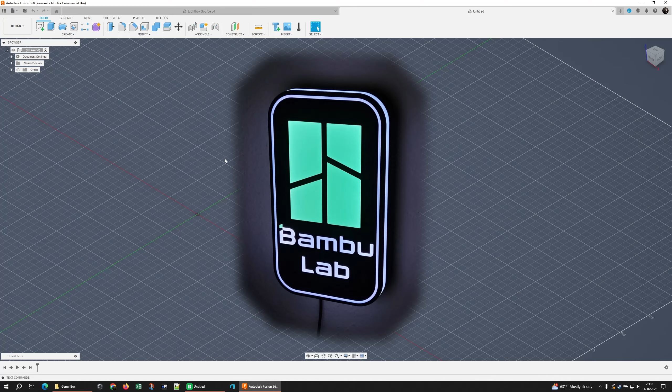All right, so let's make a light box. I've got a new drawing open. We'll start off by creating a sketch, and I'll go to the XY plane.

Normally, if I'm importing stuff, I would create a bounding box, saying 250 by 250, so I know the size of my print bed. But I'm making something I know will fit in there, so I'm not going to do that right now.

I'm going to start out of habit by putting a point down, then hit M to bring up move and point to position. I'll select my point and put it in the middle, 125, 125 - no real reason, I just like it there. I'm going to use this point quite a bit. For example, the very first thing I'm going to draw is a center rectangle.

What size do I want to make this thing? One of the things I love about Fusion, even though I have it set for metric, which I'll use for the majority of this, is I can easily just type in 8.5 inches, which is the size I want this to be. And now I've got 8.5 inches.

If I were to do this correctly, and say I want 8.5 inches here, I'd want this at a certain ratio. I'm going to mimic the size of a monitor and do a 16 by 9 ratio. I don't know what that is for 8.5 inches, but you don't have to just type numbers into Fusion - you can give it math. So I'll tell it 8.5 inches divided by 16 times 9. And now I have a 16 by 9 ratio box to work with.

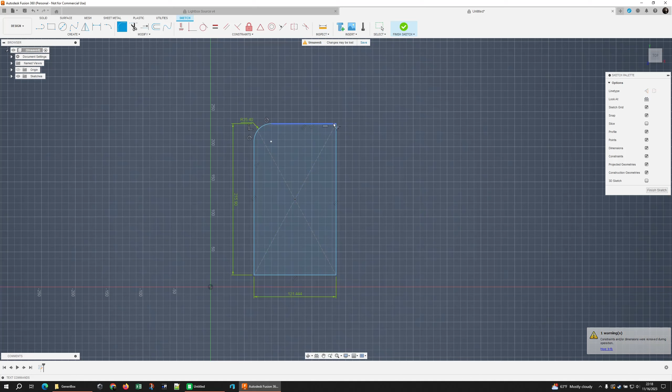You can do this with the solids, or you can do this with your drawings - works either way. I like doing it in the drawing so it has all the elements already there. It makes it easier when you're doing offsets and things like that. It's best to do it in the sketch versus on the solid, at least for the rough shape. When you're refining your solid, that's a great time to do it then.

I know there's a key for repeat, I just don't remember what it is - it'd be nice if I could remember that. But there we go, a nice little round box.

Now, this is 215 millimeters, so I know out of my 250, I have a little bit of room to work with. I'm going to do a few offsets on this.

My first one - and this is where more math comes in handy - I like to set all my line widths to 0.42 millimeters in Bambu Studio. I haven't done that quite yet. I need to change - actually, no, I already have, it's just the sparse infill that's big. So yeah, all my line widths are 0.42, some of these are not the default, some are.

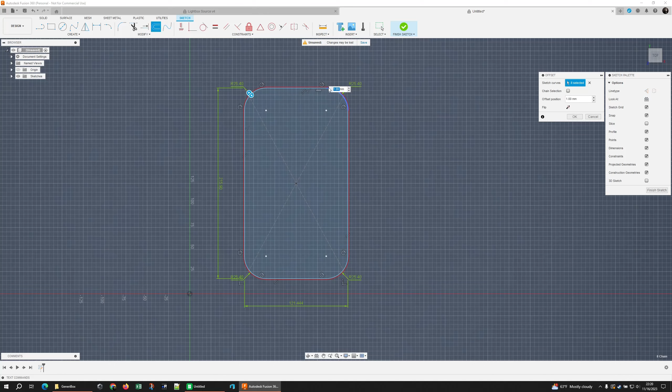So I'm going to work with that as my multiple here. I want these walls to be, I don't know, 5 or 6 thick - let's go with 5. So I'm going to tell it 0.42 times 5 - oh, come on, get back in the box - and now I have a 2.10 millimeter thick wall.

Awesome, I need to do that again. Now that I know it's 2.1, I can tell this to do another offset by hitting O. By the way, I was double clicking - let me go back. Just click a line, you get one piece; if you have a continuous line and double click, you get the whole thing. So O for offset, 2.1 times 2. I could have just typed 4.2, but I'm trying to show that point.

So I have my two offsets, and when we extrude this, you'll see why I have those as they are. Got a little bit more geometry I can work with here, which is good stuff.

I'm going to cheat just a little bit - I have a handy little reference that I usually start my light boxes in. I'm going to come in here and steal, oh come on, just my keyhole. Just select it, Control C to copy, come back over to this guy, hit paste, shows up down here.

Control V for paste. Now, real quick, I'm going to draw a couple of sacrificial lines. I want one going this way, and one going this way.

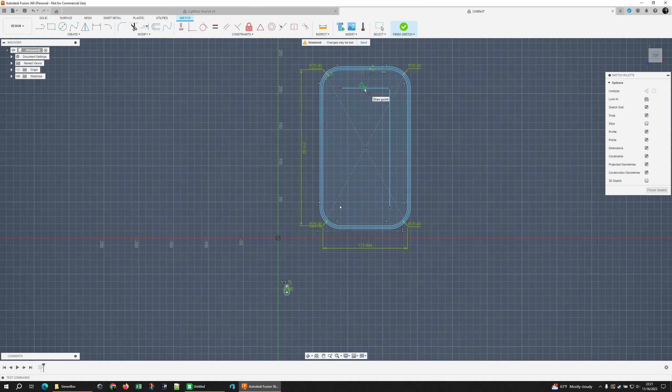I'm then going to create a point on that, one in the middle - that's what that little triangle means - and one in the middle there. We can delete those lines now, we don't need them, they were just to orient my points.

I'm now going to select my keyhole and hit M for move. I'm going to scroll in here so I can actually click on it, and point move that hole, or that point, to right there.

Then I'm going to grab it again, hit M for move, point to point, that same point, this point, except now I'm going to click create a copy, and I'm going to rotate.

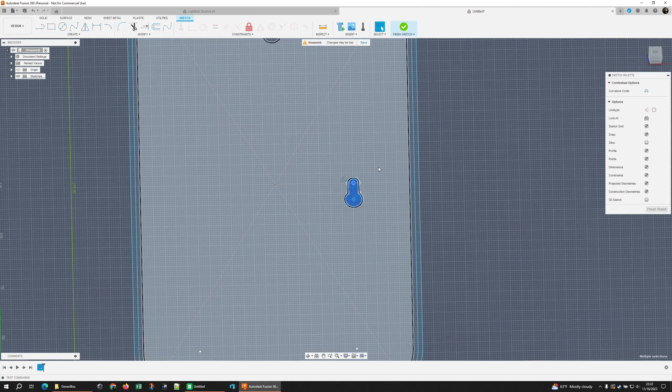I have to go select an axis. Yeah, we're not going to rotate it that way. Now I'm going to select it and hit move again so I can rotate without an axis. Nope, I have to select the right one. And rotate it here.

I'm going to use these to cut holes in the body when it's finished. These are so the box can hang in either a portrait or landscape orientation off of a thumbtack, a nail, a screw, or whatever.

That's all I need in this drawing. Yeah, we're good, so finish that. From here, we could start putting a few things together.

Going to, first of all - well, I want to put another feature in here, and I guess I'll make it part of a different sketch. So this one I'm just going to call box. I label and name everything because it helps.

So we'll do the basic extrusion on this. First things first, I'm going to grab all of it and extrude up. I'm going to print the base of my light box at 0.28 millimeter height.

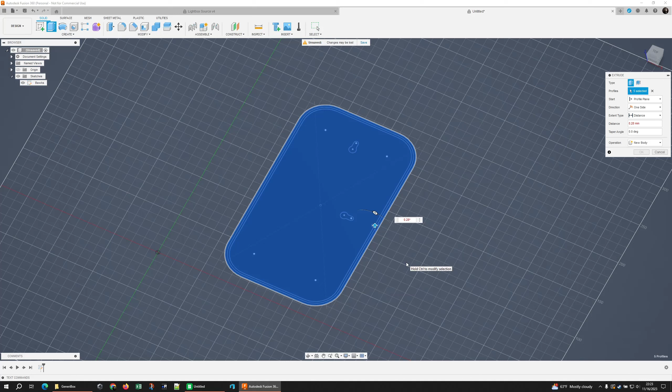So for this, I'm going to tell it I want - come on, move over here - I want 0.28, and I want that to be, I don't know, 8 layers thick, a little bit of infill in the middle. I think 8 will work.

How thick is that? I'm tired, math is hard. Well, if you want to see what that looks like, what the actual distance is, you can click inspect, click on the top, flip it over to look at the bottom, click on the bottom, and it tells you - that's hard to see, but 2.24 millimeters. I'm okay with that, I like that height. That works for me. So we'll close out the inspect tool.

Now, when you extrude for the first time off of a sketch, it turns your sketch off, so you have to turn it back on.

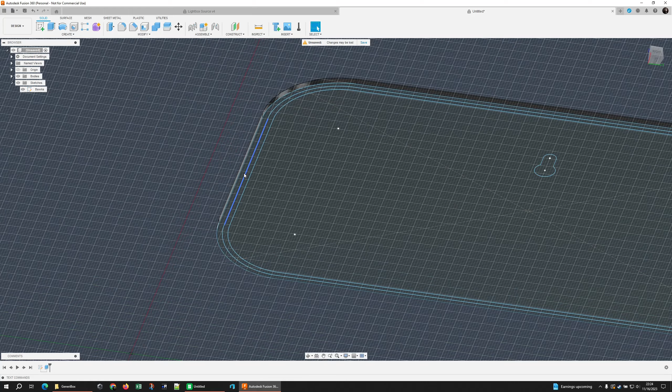For this box, I'm going to do a few things. I have a fairly standard pattern that I work with. I'm going to kind of work in reverse, and this might be a little bit confusing, but I'll explain why.

Okie dokie, I'm going to grab that same part again, that same plane of the sketch, or sketch face I think it's called. I'm going to extrude that again. And I know what height that was at because I'm doing the math in my head.

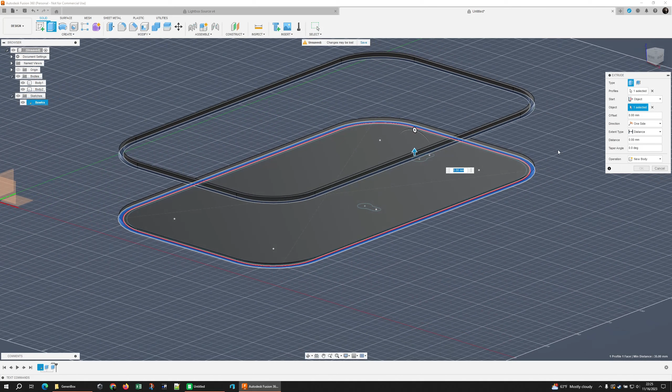But let's say I don't know where it is because it ended up somewhere funny. I can click on Start Object, and click on that part right there. It's going to start from there, and now I can tell it I want it to come down another 10 millimeters. This is going to try and join them together.

The default operation when you have touching bodies is to join. I'm going to tell it to create a new body instead because I want this to be a separate piece - this is going to be a decorative piece.

Okie dokie, and I'm going to do it one more time. In this case, I hit E for extrude, and my extent type is going to be to object. And I'm just going to bring it up to here.

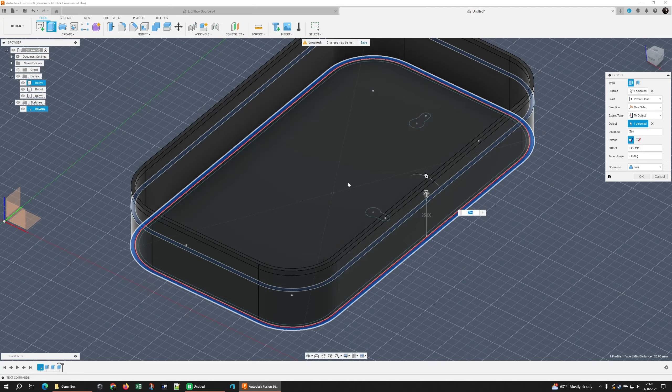Now, the default operation, because it's cutting through other material, is to go into a cut, but I don't want that - I want it to join. However, I only want it to join the base. I don't want it to join this piece as well, so I'm going to turn that piece off. If it's not visible, it won't join to it. Click OK.

So now I have my base piece, which includes the actual flat piece and the first set of walls. I've got my lip, and then I've got my decorative band. Body 1, I'm going to call that base black. Body 2 is base lip black, and body 3 is base accent. I'm going to create a group, call it base, and drag those parts in there. This is to make life easier when you have more complicated designs. I can turn that group on and off at will now.

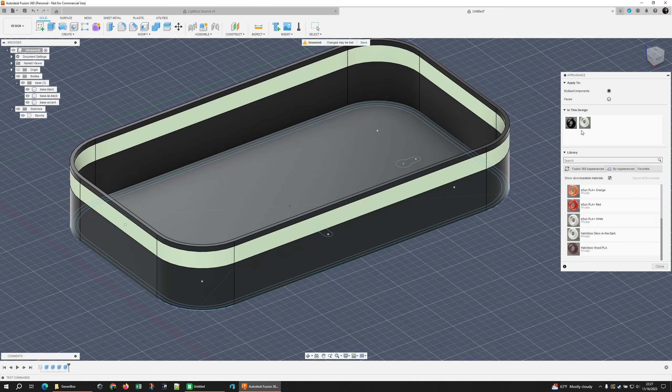Now, I already have a lot of material preferences set up. You can define your own materials if you'd like. In my case, I'm going to drag my glow-in-the-dark to this little band right here. I brought up appearances by tapping A. That's basically what that's going to look like. That's what I want. This is just the standard formula I use on all of my boxes. I love the way it looks, but I want to do some fun stuff with this one. I want to change the way this formula works.

So let me turn my base off, and we'll go back into this sketch. I want to put a little alcove down on this corner where I can hide the power cable that will plug into this. And we can do that. I want that to come from this outer wall right here. I want that to give me about an inch worth of clearance.

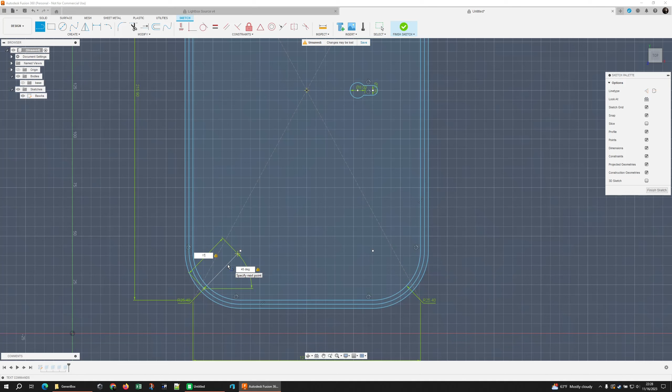So I took a point from that middle, told it 1 inch in at a 45-degree angle, so it put that point right where it needs to be. And now I'm going to have to make 2 lines here. I can just make 1. Do the same thing. I'm going to drag a line all the way down to the bottom here, and you can see it's snapping with that little green X that shows up, and I'm watching my angle for it to stick at 45 because I want this to be a 45-degree angle.

So I'm going to go ahead and click to put that one down, and I'm going to OK out of that. I'm going to grab the original line. It was sacrificial, get rid of it. And now I'm going to use my extend tool, and I'm going to extend this line all the way across. So now it is crossing between all of these different lines.

So far, this has changed nothing. Our base looks exactly the way it did before. If I finish sketch and look, nothing has changed here. It's still the same old base. But I'm going to use that line to do a couple of things. So let me go back into the sketch.

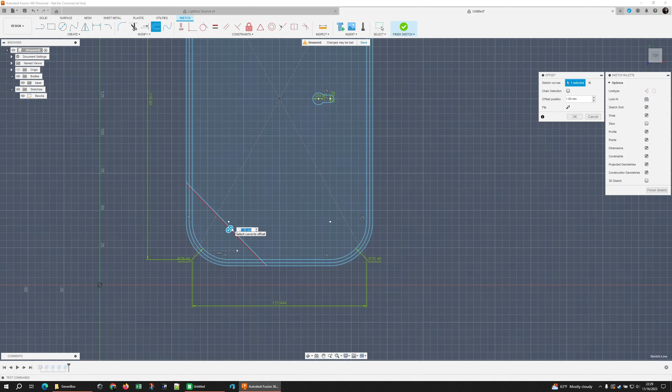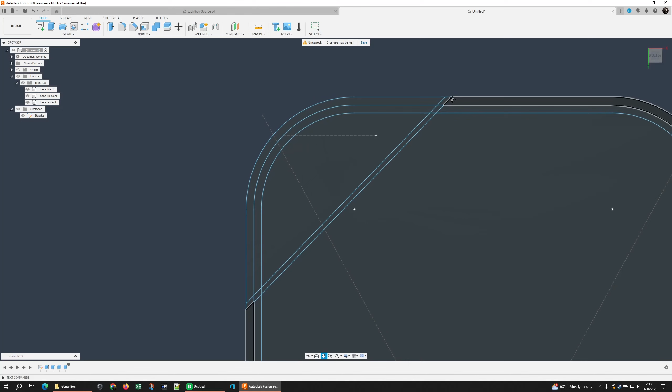Okay, so with that there, what I'm going to do, and I have to flip over to the underside of this to see it. So let me turn off the grid so we don't have that in the way. I'm going to actually click on bottom so we can make this easier to see. I'm going to highlight these components here, all of those little sketch faces, and we're going to extrude again.

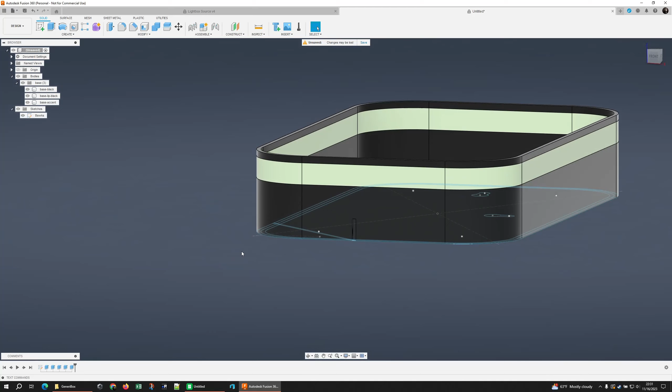And I want this from the outside of the box to be 10 millimeters tall, or whatever would be evenly divisible by 0.28. So real quick, because math is hard, 10 divided by 0.28, about 35 lines, 38, 36 lines. Let's use 36 lines. So I'm going to extrude this 0.28. Wait a second, our first layer is going to be 0.2, so let's consider that. 0.28 times 35 lines plus 0.2. That's where I want that to be. And is that actually exactly 10? Hang on, I got distracted and clicked when I shouldn't have. It actually came out to exactly 10. That's hilarious. Okay, so yeah, 10 millimeters. I could have just typed 10 millimeters. That would have worked perfectly.

However, I didn't want to cut that. That was a mistake. I wanted to make that a new wall and merge it together. What I did here when I incorrectly did that, I said, let me change it. I came down to my timeline, right-clicked on that extrude option, and told it edit feature. This is one of the things I love about Fusion.

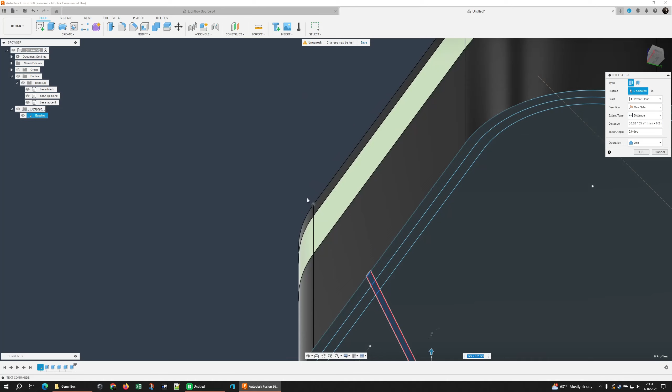You can come in and change things. Like, I meant to make this a join instead. I can just change that. If I accidentally didn't select all the things I needed, like let's say I had forgotten to actually choose the wall, you can come in and add and remove objects to it. I'm just holding shift to do that. So it makes it real easy to come in and make corrections.

And you can do this at any point in your timeline. If you forgot a step 5 steps ago, you can come back in and change that. So now that I know that's 10 millimeters, which is actually really cool, I need to do a few more things. I'm going to take these 3 faces here, and I'm going to extrude again, 10 millimeters, and I'm going to let it cut this time because I want it to cut. I want to take that corner away, cut it out.

Then I'm going to select those same 3 faces again, and I'm going to extrude again. And this time I'm going to say I want to start on my object, which is this right here, and I want that to come up. It doesn't have to be super thick, but 5 layer height sounds about right. So 0.28 times 5. And I'm going to tell it to join.

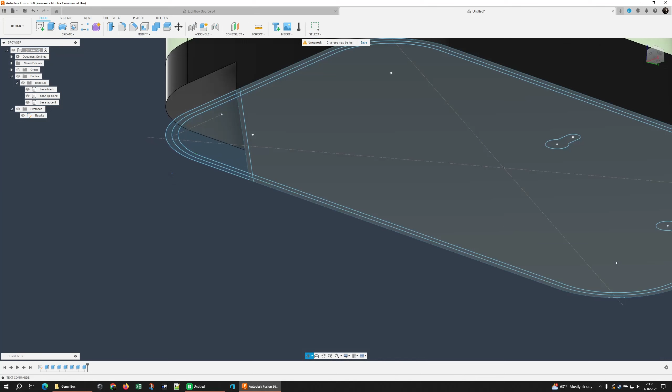Oh, I forgot something. So here's a good example. I didn't select everything I wanted to. I'm going to go back to Edit Feature, and I'm going to add in these parts that I forgot about. So now I have that nice seam right here. That's what I wanted earlier.

I can't leave well enough alone. I have to be fancy about things. I'm going to add in a chamfer to this. Chamfers and fillets are just little ways of kind of cutting corners. I'm going to select all of the elements that I want to chamfer, including this side, and bring up my chamfer.

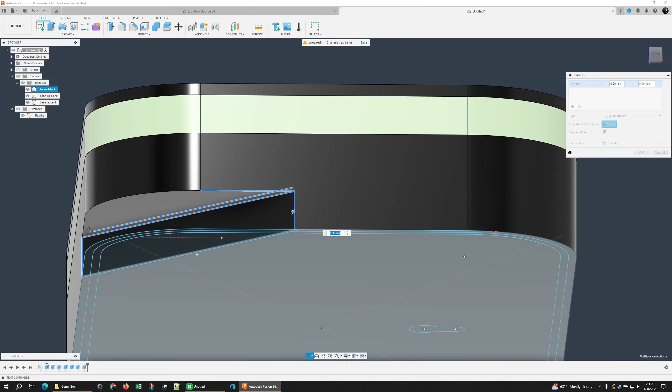And it looks like it still has everything selected. No, it does not. Okay, well, bring up chamfer, and then you can just click on the parts you want. Select all of those. Let's make sure I get this one as well. Okay, so all of the faces where your fingers might go is my point.

I want to try and cut those down a little bit. See what 1 looks like. Just 1 millimeter. Not bad. Because it has room to do this, it's going to be 1 millimeter by 1 millimeter. This will be a 45-degree angle.

If I come in here and look directly at it, you see this line right here is the edge from this face right here, and that is a 45-degree angle. A 45-degree angle will print very nicely. If this were any lower than that, like it was a 30-degree angle, it would probably not print so well because that's a pretty steep overhang.

You could print it with a much higher angle, but there's no real reason to. I'm just trying to take the sharp edge off of this. I could do a fillet instead of a chamfer, which is a rounded corner. They don't print as nicely because the first layer or 2 of a fillet is going to be a very steep overhang, and they never print well. I prefer chamfers where I can use them.

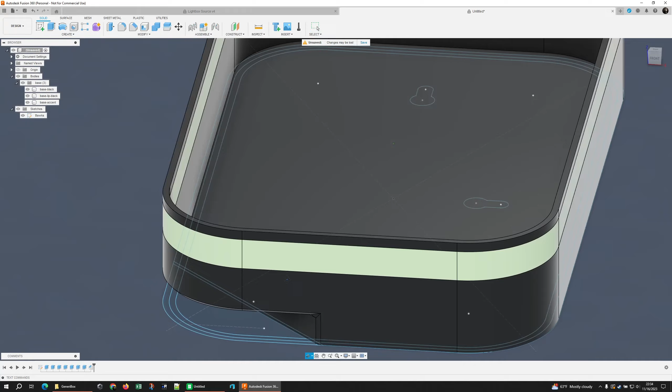So I've got basically this box done. I need to come in and cut the face or these keyholes out. So I'll go underneath it, select my keyholes, extrude, and just drag the arrow up. Doesn't really matter because it's going to be a cut, which is what I want. Now I've got my cut done. That's pretty much that at this point.

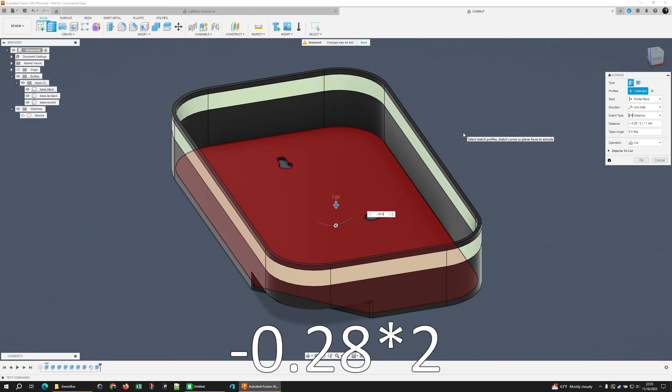Now I'm going to do something else. A little trick that I've used on a lot of these boxes, and I think it works very well. I'm going to select this face right here, this object face, and I'm going to extrude negative 0.28 times 2. I'm going to take 2 layers off the top of this because I'm then going to come back and add them right back in, but as a separate body. So 0.28 times 2, this time though as a new body.

Why would I do that? Because I've literally, oh, I told it to join. Silly me, let me fix that. No, I did do it as a new body. Where did it go? Oh, there it is. I missed it, I'm sorry.

So this is going to be base reflector. And I'm going to bring my appearances back up to try and represent what this would actually look like. I'm just going to drag my white over to it. I did something wrong with that extrude because that is way bigger than that should be.

Let's go see what I did wrong. 0.28, oh, minus 2 - it's supposed to be times 2. New body. 0.28 times 2, there we go. That's what I wanted it to look like.

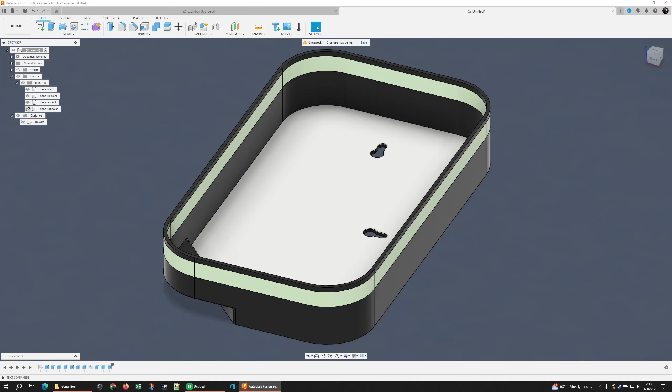The idea here is I have this 2-layer thick object that will be in my list, so when I get this into Bambu Studio, I can specifically tell it to use my silver PLA to create a reflective layer inside the box, or white, or whatever. If you try to do this with the painting tool, you have no control over how deep it goes.

And it doesn't need to be a lot. It's the inside of the box, you're not going to see it. I just want it to not be black, basically. So those 2 little layers, that's all we need, it's fine.

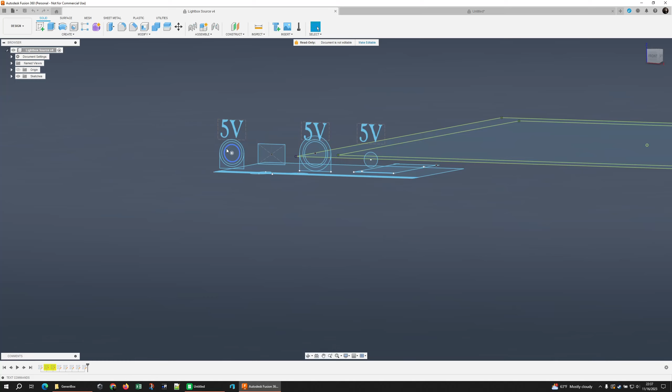I need to put in here, on this face, we need to put some holes because we need to get power into this thing. I could go back and look at my source here to figure out what I want to put in here. I've got my 7.8 millimeter hole. I've got my 10.2 millimeter hole. I've got the one which I think I'm going to use on this one.

I've got this guy, which is going to be my choice. Let me turn off the rest of them so I can just select what I need. This is going to be the one I'm using because I want to use this one.

This hole and its accompanying body are specifically for an SP110E, an RGB controller. And I made this up a while back, just measuring one after I tore the shell off of it.

So what I'm going to do is come back to this one. I'm going to right-click and create sketch. And I now have a sketch plane against that line, which is going to be important because I'm going to paste in - oh no, that came in funny.

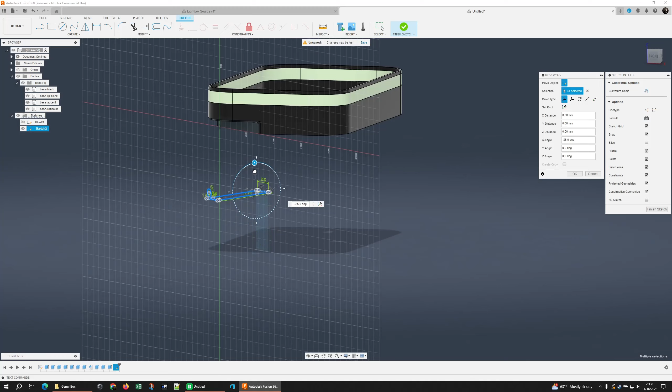No, that's not what I want. Well, maybe I can salvage this. Rotate 90. As long as I'm still lined up this way, I am fantastic. Okay, and we will accept the move copy for that.

I need to put a point somewhere on this face where this hole will line up. I want to try and center that against this face. So what I'm going to do, I'm going to zoom in on this.

I'm going to grab a line tool. Let me bring it up. There we go, and I'm going to look for that triangle somewhere in the middle. There's my middle, and if I measure up on this, it's 9 millimeters tall.

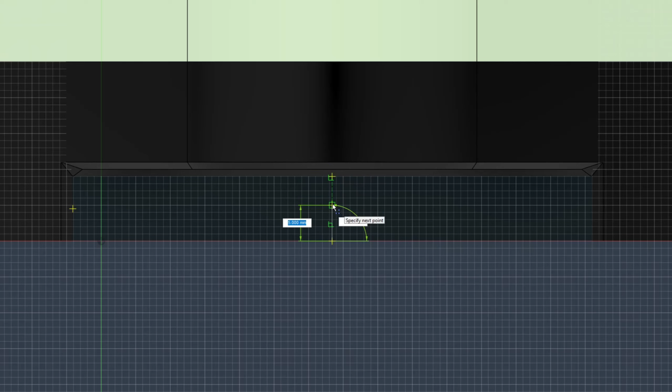Remember, we lost 1 millimeter to our chamfer. I think that's okay, so I know my middle is at 5. So I'm just going to put my line there, create a point right on top of it, and delete the line.

Let's come down here, grab this thing, move point to point, grab this guy, and put him there. Uh-oh, that's not going to work. That doesn't fit.

Because I need that to be taller. The way I drew this, this is where the circuit board is, and this is where its little mated hole goes. So we need to add a little bit more space on this.

Okay, well, since I need to make a change to this, what I can do is finish my sketch and get out of that, and come back to my box.

Let me name this one real quick before I forget. It's not ESP, it's the - what was it called? SP110E. SP110E, label it just so I know what it is later.

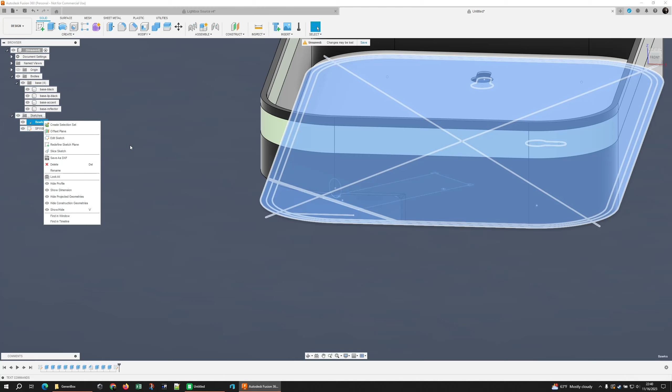Go back to my box. Or actually, I don't even need to go back to my box. I need to find the extrusion I did when I defined how tall this wall was. It was like the 3rd or 4th one, I think. Nope, 4th, 5th one - we're going to edit that feature.

I want that to be 15 tall, not 10. And then I need to find that one where I actually drew the wall itself in. Or I'm sorry, the one where - where's the one where I drew the wall in? Wasn't that one? Is it that one?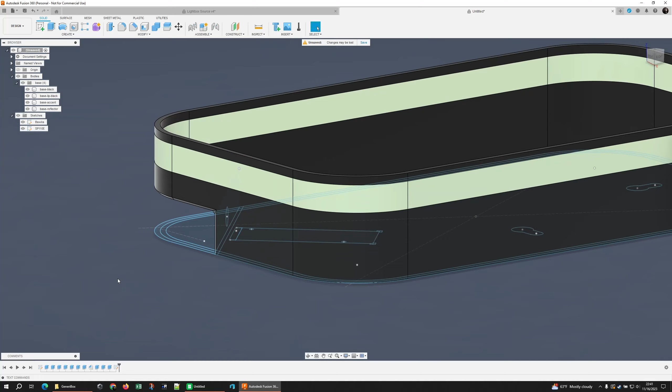So, well, we made it 15, so I'm just going to type 15. If it divides evenly or not, I don't really care, the slicer will figure it out, it can ensure vertical height. What I do care about, the strips you put in these things are typically 1 centimeter tall. So I'm going to inspect, and look at the height from this line to this line. Ooh, that got a little bit close.

Because I'm pretty sure my strips are taller than that. Maybe 15 is too tall, maybe I have to go a little bit smaller. We will see. The alternative, of course, I could always just put a plug on here and then put the board somewhere further in.

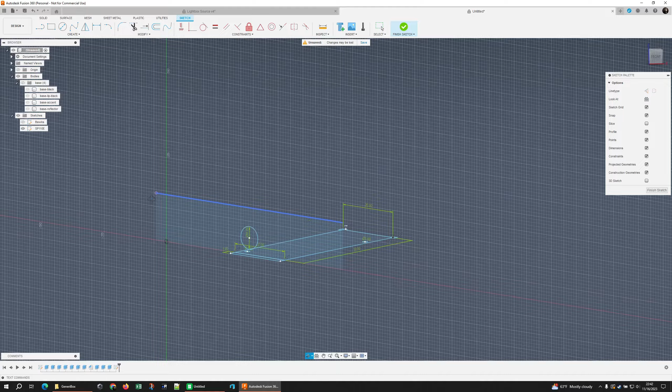So I need to come up with about 1.4 millimeters. I think I can do that. So let's go back and see if we can. I'm going to edit this one and select all of its elements. I want that. Let me turn the other sketch and the base off for now. I just want these components. There we go. And I'm going to turn this back to visible.

And we're going to move. I don't know if this will work. Let's find out. Can I move that point to there, to that line? Will that work? Doesn't seem like it. Damn.

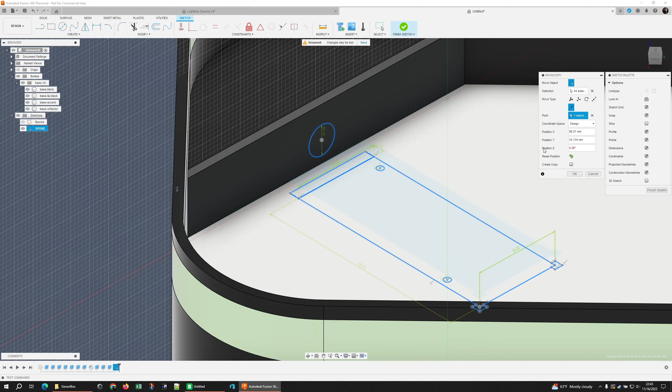Okay, well, we can just translate instead. So, translate it up. Of course, it's really hard to gauge where that actually is. Well, that's not working, so we can use move to position. Remember my Z on this, we had done 0.28 by 8, I think it was. So let's see if that looks like it lines up. Looks like it lines up to me. I think we're good on that.

Although now I'm questioning if I was supposed to place that on the inside or the outside. I think it had to go on the inside. Hold, please. Okay, I went back and double checked. I looked at another drawing where I'd last used this. I haven't used it in a while, and I remember what I did. It's actually, this is supposed to represent a wall right here. That's what this little nugget is right here. So I need to move it forward a little bit.

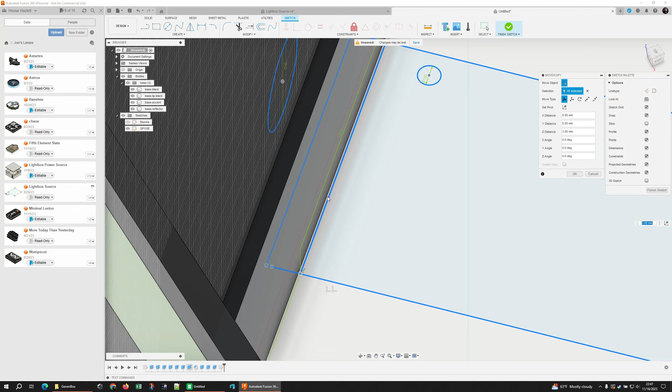Let's go ahead and select all of that again, and move, we'll just translate it. Bring that forward. Right about there should be good. So this just butts right up against it, and then that hole opens up for the thing to get through. And yeah, that's close enough. I'm fine with that. Okie dokie.

So the purpose of this, what this thing does for me, I am going to take these two little pegs right here and extrude them up, I don't know, 4. Why are you going down? Orientation must be wrong on this. I want those to come up by about 4. I actually don't want those to be a part of the silver, I'm fine with those being black, so we'll make those new bodies.

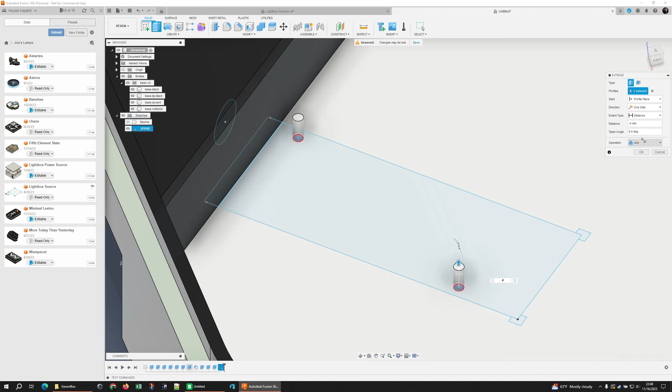And add those to it as well, as that just catches it, those hold it. That should be okay. Yeah, I'm fine with that. And again, to be fancy, just to make it easier to actually put these things in, I'm going to select these two faces, and this time I'm going to do a fillet, 0.75, yeah, 0.75, just round those off. So when those print, it just won't be a flat edge. It'll make it easier to slot this thing on top of.

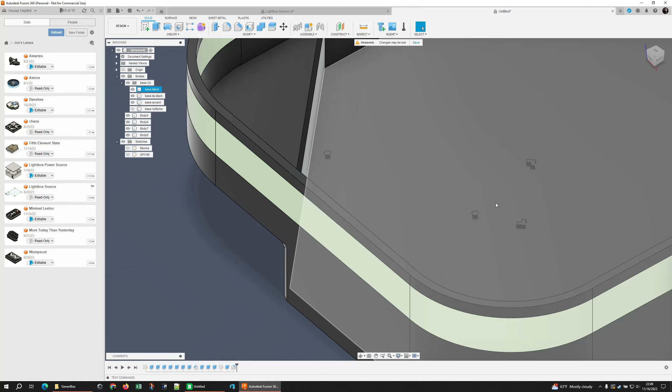Actually, I'm going to change what I was doing there. I am going to turn off the reflector layer, and go back to my extrude, and put an offset on here just to bring that down, so it's actually touching this base layer, and bring it back up just a tiny bit more. That is going the wrong way. Oops. Why is that going the wrong way? That should go that way.

Did it decide it wants to go the correct direction now? Okay, whatever, Fusion. Although I wanted those to join, not new body. And they're not joining. Okay, you know what, we'll just delete that altogether. It's going to warn me because the fillet doesn't work, so I removed it. Let's do that all over again, but this time without the reflective layer.

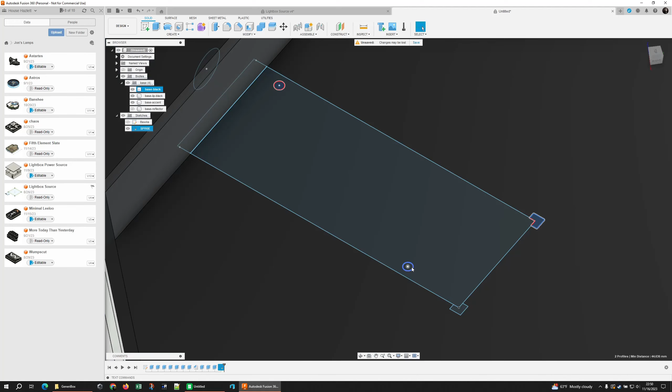So I'm going to grab these two parts. I'm going to start at object and go up 4. For whatever reason, it's still inverted, probably when I flipped it over. Or is it just being silly? There we go. So now I've got a little peg to put these on. I'm going to put some tape underneath it anyways, this is just to help it. Go back in, we'll do those fillets.

0.75 was what we used before. That's good. And let's grab that hole and cut it out.

So now I have a spot that when I go to paint or print this, it's just going to skip putting down the silver right there. My black is PLA plus, my silver is regular PLA. Not that it matters for such a tiny part, but that will help make it a tiny bit stronger, having PLA on PLA, or PLA plus on PLA plus.

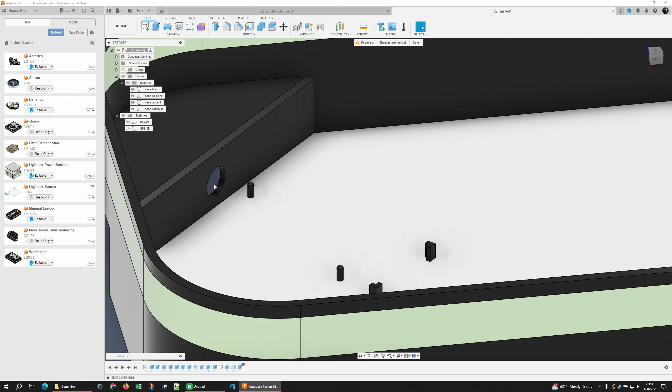I'll be able to take my little control module and stick it in here. The whole reason why I'm doing this, that little hole, I can now put a power plug in that. If I inspect from the top of that hole to this line right here, it's about 3.5 millimeters, which should be more than enough for the jacket around any kind of socket. So yeah, 15 millimeters was definitely a much better choice here. That should work fine, I'm okay with that.

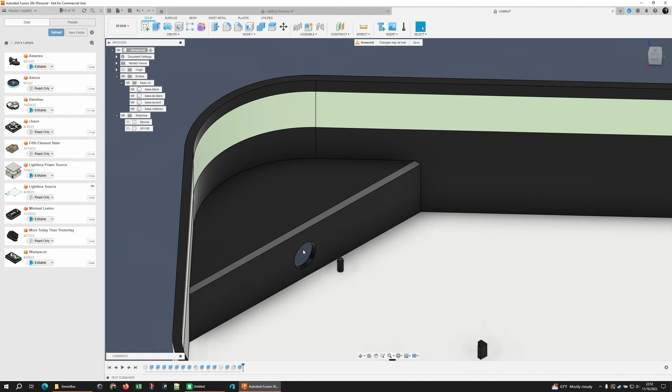It's thin too, which is necessary because I have other things I'd put in here, like a little USB-C breakout that needs to have a very thin depth. The USB-C female end that's attached to the circuit board only sticks out by a little bit, so this wall being thinner is fine. It's going to have plenty of strength and support from the rest of this.

I don't have any artwork to put on the face, which we need to make next. So I'm going to turn my base off and turn my box sketch back on. At this point, I'm debating if I want to create a new sketch for the face or not. You generally don't have to, but I think it might make it easier because then you don't have extra elements cluttering it up. So I'm going to select the parts I want, which are these 3 walls.

I'm going to hit Control-C, new sketch, paste. Oh, I wanted to copy over the center point as well, so Control-C, Control-V, okie dokie. Now if I turn off box, I just have this to work on for my face. Not face 3, just face.

The reason why I'm doing this is so that if you're going to bring in design elements, whatever the face of your light is supposed to be, you have artwork you want to put in, whatever, this would be where you import it, line it up, and make it fit. However, I'm going to do at least 1 or 2 things on here. We'll just do something for an example.

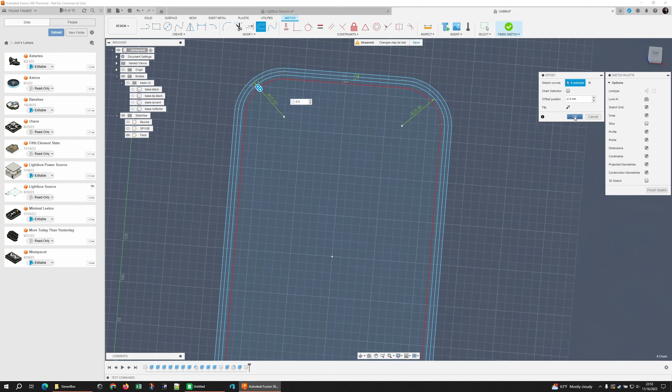I'm going to do another offset, this one being negative 2.4—or 2.1, no, I want this one bigger, I want this one to be 2.4. This one's going to be decorative, so we're getting into things that are no longer strictly functional.

We put together our body, and we need to add a face to it. Remember we came up to 38 millimeters here? Well, my box is going to be 40 millimeters tall, I just like that height, that's what I work with. And I'm leaving a 2 millimeter space for the face of it. So turn my base back off.

I'm going to grab just this outside ring and extrude. I'm going to give it an offset of 40 and -2. I don't know why, I like to work down from the top. So we'll create that one.

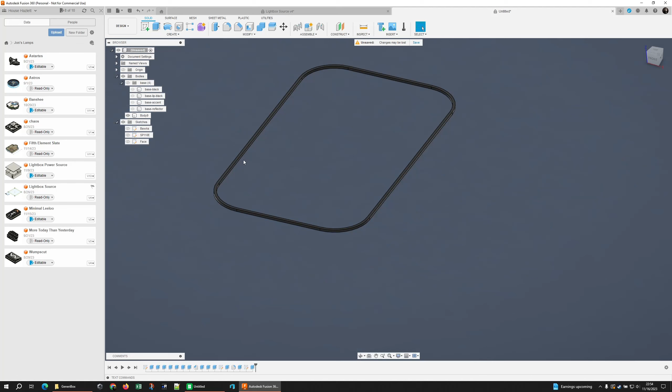Turn my face sketch back on and grab the next one, the next ring in. Same thing, offset of 40, but -5 this time. This will give me a little lip that can attach to the base, and I'm going to let that join.

Because if you don't join these, if you leave them as separate objects, when you go to slice it, you'll get additional outer walls between them, because it will see the two objects independently and treat them as two different objects with their own outer walls connecting to each other. By joining them, if they have any hollow space inside where it would normally be infill, it will actually create infill. That's actually one of the things you commonly get when you repair a model—it fixes things like that where you have entirely encased outer walls touching entirely encased outer walls. It sees that as a mesh error sometimes.

I'm going to grab the next one in, and this is where we start doing decorative silly stuff. I'm going to do this as 40, and this time minus 0.6. This will be a new body. Okay, and we'll grab the next one in—same exact thing, 40 minus 0.6, as new body.

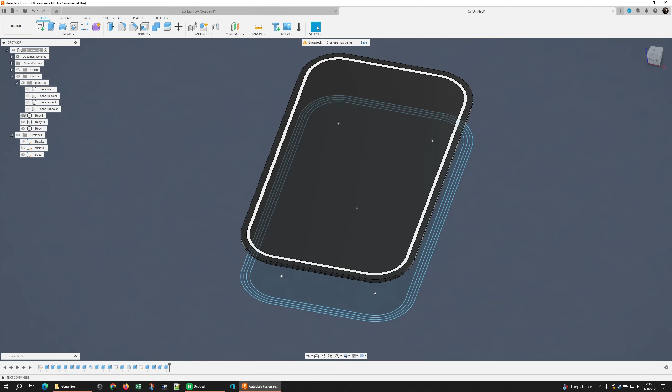The face on here, I generally throw my white. I like to have a little white ring that kind of wraps around the face. So if I turn off my sketch, just have this little box like this, the little face for it.

Again, let's keep things fancy. I'm going to bring up my chamfer tool, take the entire outside perimeter, knock 1 millimeter off of it. No reason why not. It prints clean, it takes a sharp edge off of it, and gives just a little bit something more to make it special and different.

Cool. So we've got a nice looking little box here. If I turn the base back on, it's about what it looks like.

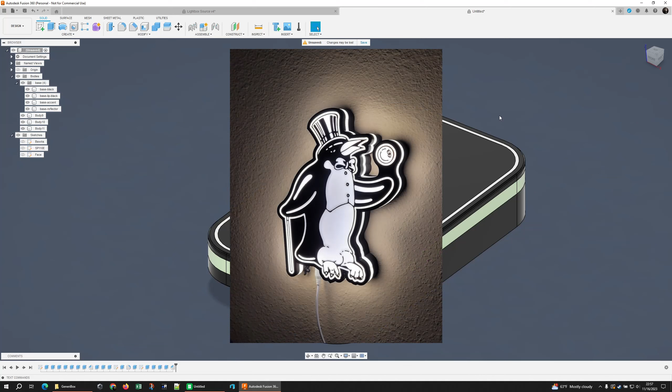Okay, but I don't want this face to fall off. I don't want it to have to require screws or glue or anything to be held on. For something with such a basic shape, just a rectangle like this, it's not going to have very much friction holding it together. If you have something with crazy lines and edges and stuff like that, you'll get a good friction fit out of it.

But these Bambu printers are very dimensionally accurate when they print, and you're going to have some fun with this. It will fall off. And I don't want to put glue on that, because what if the light strips with their super cheap adhesive strips don't stay in place? Well, now I have to tear it apart to get into it to try and fix the light strip, and if I glued it in, I'm going to ruin the box.

So we're going to put some little tabs on this. First, a little bit of organization. Let's create a new group, call it face. I was not where I need to be. Come on. Face. Let's identify our parts.

We've got face, lip, black. We've got face accent. And we've got just face. Art. We'll call it face art. There's nothing there, but whatever.

Face art. This piece right here would usually be where you put all of your design stuff. Whatever image, text, logo, whatever thing you want to put on there. Not doing that here because time constraints. When I print this, I'll put something on it. I don't know what yet.

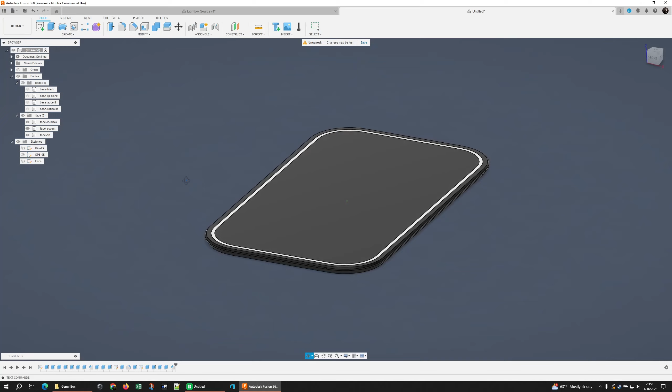I am going to start by turning off my base. And I need 2 more sketches. I need to come into one side, and I'm going to choose the underside of this lip and create sketch. I'm going to come back over so I can see it.

And I'm going to cheat again. I'm going to find my center point with a line right about there. And if I measure this, it's going to be 3 because that's how much I gave it. So what I'm going to do is come down and draw myself a 2 millimeter line. Well, actually, I'm going to draw a 1 millimeter line because that's where my center is, and I'm doing a center rectangle. So there's my little line, create point, create point.

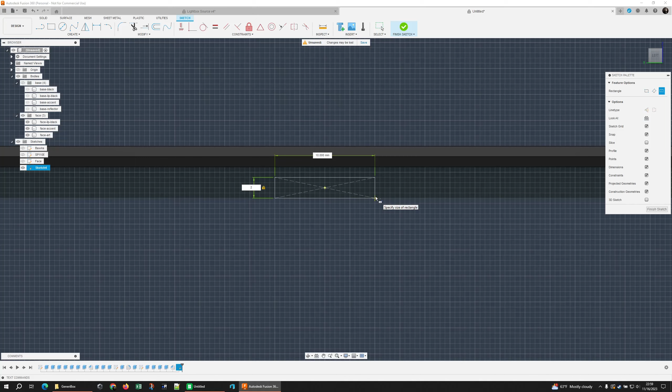Okay, and I'm going to delete the line because it's just clutter. I'm now going to tell it, give me a center rectangle that is 2 millimeters tall by 20 wide. Okay, and that's all I need in this sketch, so finish that.

What I'm going to do with this, I'm going to take it and extrude out 1 millimeter. Except I didn't mean to do that because now I can't see my sketch. I can't get to it because I have something in the way. So we'll undo that. And I'm going to do the opposite end first. Tell it from object, this side, the opposite side, and -1 to bring out a little peg there.

And now we can come back over to the original side and we can extend it 1 from here, call that nubbin-y. And let's go do nubbin-x. I'm going to come over to the top of the thing, which I guess this would be Y. Doesn't matter, they just need to be labeled differently.

Same exact procedure. I'm going to find the middle and draw a— which you may be thinking, well, why are you drawing the line? Why don't you just put a point down? The point, maybe it'll snap. Yeah, as soon as I find the center, it's going to try and use the center instead of snapping to the grid, so I won't be able to get it exactly where I want it. If I'm doing something like over here or over here where it's not that middle point, yeah, it's going to try and give me more control. I don't know why, whatever.

To get it where I want it, it's easier to just draw the line. I could put the point down and then move it, I guess, but whatever, it's easy enough to just draw a line.

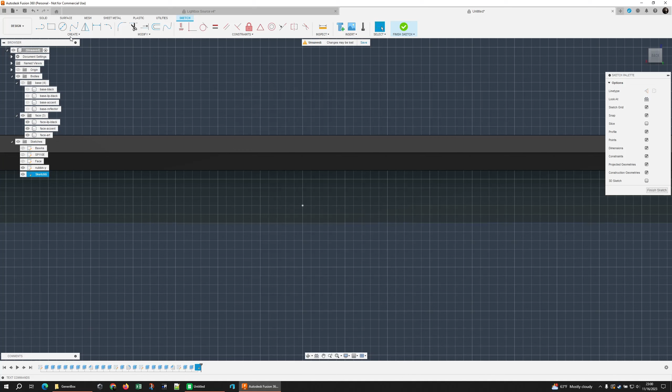Rectangle, center rectangle, 2 by 20. Finish sketch. That's nubbin-x. Not make the same mistake we did before.

I'm going to hit E for extrude. I'm going to come over to the other side here, from object, and because we're going backwards, -1, okay. Come back over to our front side, turn the sketch back on so we can see it. Extrude 1.

So I've got these little pegs. Well, they're not going to work great for what we want to do, so let's add some geometry to it.

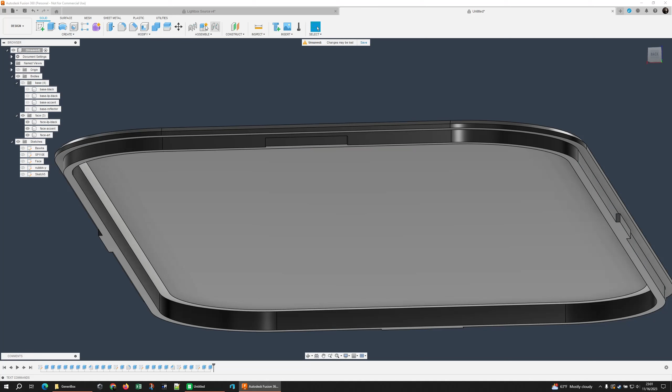Chamfer tool, and I'm going to click the face of the thing, not the edges. I'm going to go around and get all 4 of these faces. All 4. And we'll bring them in by 1.

Because they're 1 millimeter thick, if I tilt the chamfer by 1, we have now created a nice little pyramid-looking shape. I don't know what you want to call that, but that will feed nice and easy when it goes into the base of it. I'm going to do one more step on that just to ensure it feeds nice and easy.

Now I'm going to bring up my fillet tool, and I'm going to select the front little edge of these, just to make sure it feeds nice and easy. And I'm going to take like 0.5 off of that. Not very much. That's just enough so we have a little rounded edge on it.

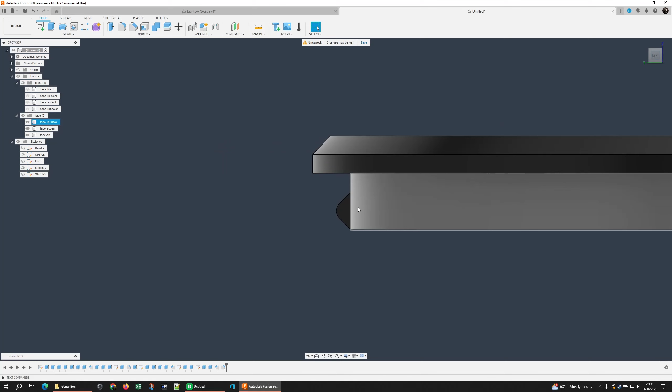It still sticks out by a pretty good bit, plenty enough to actually hold on if I force my... There we go, it still pokes out a pretty good bit. How tall is that? You're not going to measure from the apex, though, you're going to measure from the bottom. But yeah, it sticks out far enough.

So that completes the lid, the face of the thing. We've got the little retention pegs on it. We would have art here, so that's fun.

Let's go ahead and turn the face off and turn the base back on, because now we need to put the receiving ends into this. Turn my 2 little nubbin sketches back on.

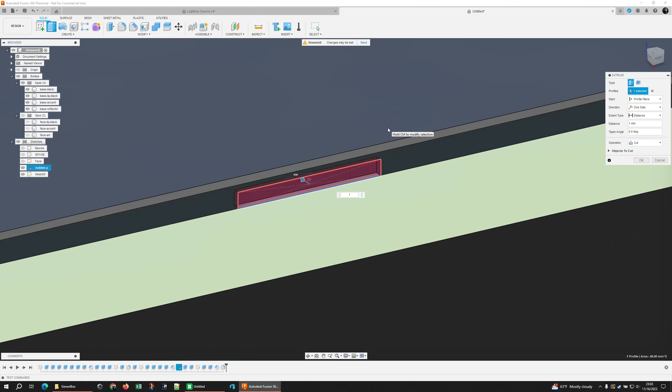Exact same procedure in reverse. I'm going to extrude by 1, and that's going to be a cut operation because this is where it's going to mate into. Okay. Extend or extrude again from object, this object -1. We get that mated hole.

This one, take 1 out. This one, rotate around to object, that object -1.

We need to refine the shape of this because those are just simply rectangles cut out. That would not do great for holding it in. It would have a rattle. It would kind of move around up and down.

So I need to be able to click on a line on the inside of there, which is really hard to do because when I go to an angle where I can see it, I've got my body in the way. So I can just turn off everything that I don't need so I can see specifically what I do need. That's part of why I label these things.

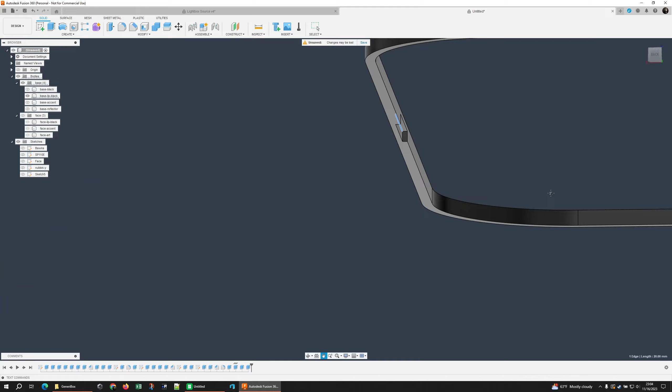So I'm going to take that corner, and that corner, and that corner, and that corner, and we're going to do another chamfer. 1, because that's 2 millimeters tall, and that will create what I think is a really nice shape to receive the actual pegs themselves.

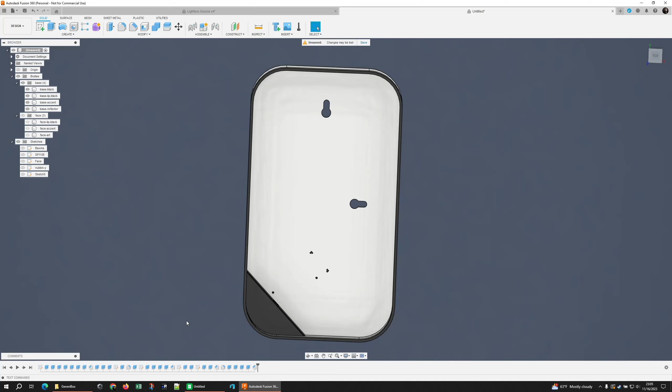If I turn all my design parts back on and take a look at it, I now have a decently sized box that has a little recessed alcove for a power cable to go in, which if I look at it this way, that power cord comes in. Hopefully this is enough room for it to have enough bend radius to come out so it can kind of hang down, or if I wanted to stand this upright on a desktop, it could tuck out of the way without poking out this side or poking out this side or coming directly out the back or whatever. I can hang it in either orientation.

That cable will adjust either way. Whatever face I print for this can be rotated around, so it doesn't have to be printed the correct way, I suppose. I'm pretty happy with that.

So what I'm going to do, I'm going to turn the face off so I can only see my base elements. And I'm going to file... Well, first of all, I need to save this thing because I haven't saved it yet. This is GeneriBox.

GeneriBox. There we go, that's what I want to call it. You have to save it before you can export certain formats. So I'm going to export GeneriBox v0, and this is going to be a step file. We'll see the differences between these things.

I had been playing with this earlier, and I swear I had faster printing with a step than I did with a 3MF, which was crazy, but whatever. So yeah, step box export.

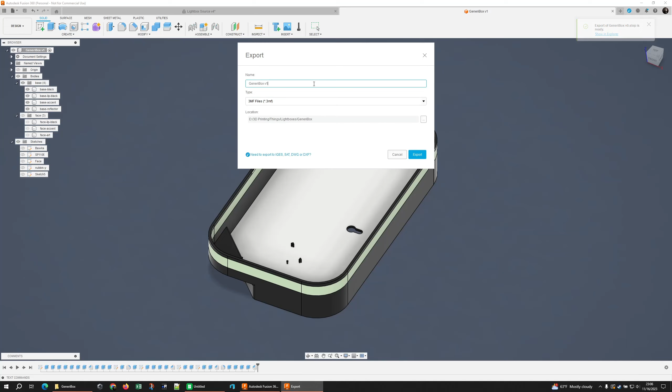And just while I'm at it, I'm going to export my 3MF as well. I also screwed up - I meant to call this base, and I didn't do that. If I come back over here, V1 base. Yeah, I meant to give it that name, sorry. And we'll turn the base off, we'll turn the face back on.

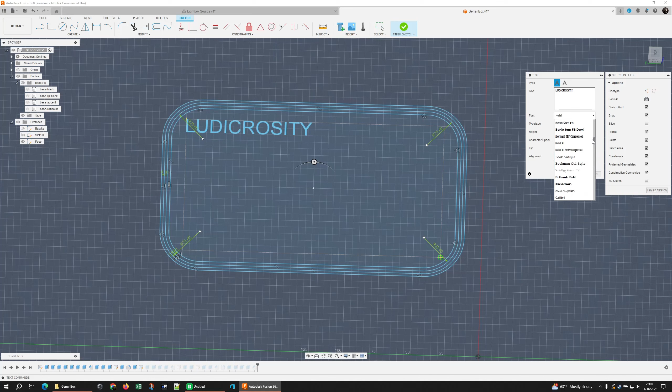Do I have armor piercing in here? I don't have my font. Oh, is it bottom maybe? Nope, I was hoping I had a certain font in here and I don't, so let's do a different one. We'll use Caslon Antique. Anyone who's a fan of 40K knows what I'm doing right now, or might be familiar with it.

We'll center that and we'll make it big. Not that big, how about that big? Nope, still too big. That big? Still too big. That big - there we go, perfect, I like it.

So now I've got something to work with. Text is a funny thing in Fusion - there's an option where you can tell it to explode text, which turns it into actual geometry. I'm not doing that, I'm just going to leave it like it is.

I'm going to export that and cut a hole - I'm sorry, I'm going to extrude it, and I'm going to offset 40 minus 0.6, as new body. New body, please. So now I have all these bodies.

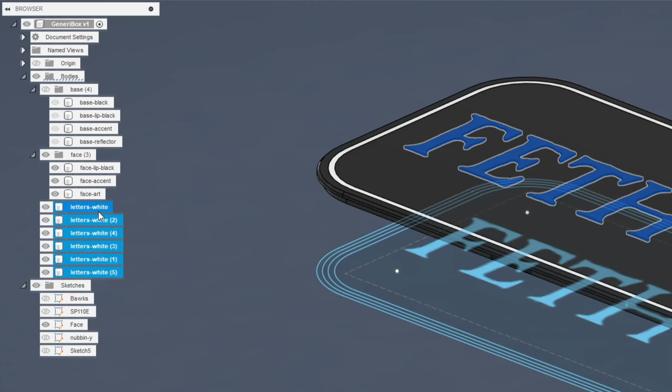These are my letters, each one has its own individual part. You can see as I scroll through them, it selects them. I'm going to select all of them and just click on one and say letters white - it renames all of them for me, which is handy. I can drag them up here to my face, hit A, select them and drag my white over, and boom, I've got a fethet. Cool.

So let's go ahead and export this now. File, export, and this is GeneriBox 1, face, fethet. Yeah, that'll work.

So, Bambu Studio - I now have a step file and I've got 3MF files. I like 3MF files for a lot of reasons. They are generic formats, you can open them in a number of different things. There are international standards used for these where it defines all the way these things work, which is great. Bambu Studio, Orca also save their project files as 3MF, but they put custom attributes in them. So a generic 3MF is not the same as a Bambu 3MF.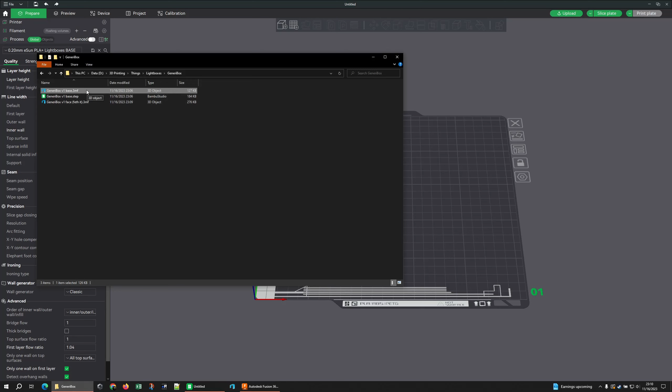If I come in here and let me just throw this in here - I'm not going to do anything special with it yet. Contains objects, yes I want to do this. I'm just going to save as real quick, and we'll call this just GenerBox v1. I'm going to take the base out of it just so it has a different file name. Show you what I'm talking about. I've got my GenerBox base geometry file from Fusion - that works. If I try and open this one, can't do that.

It's because it's now a custom Bambu file. Notice also the file size went down tremendously - it's compressed. I am not entirely positive, this is something I need to do a little bit more digging on. Was this one my step or my 3MF? That was my 3MF. If I drag my step file in here, you might be able to tell the difference. Like on this curve, see how it's kind of prismatic, how it's broken up? Come over to my step - it's a lot finer.

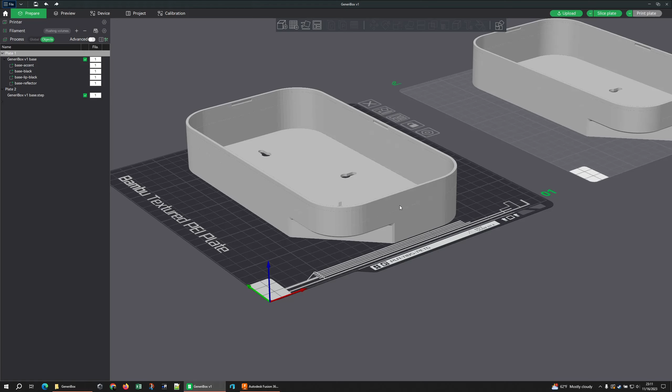There's a difference in how these files look. A 3MF is basically just STLs inside of a zip file. That's really all a 3MF is, it's a fancy zip file. By default it contains STL meshes, which are not always as high polygon count as, per se, a step file.

Pros and cons of this: all the names I put into Fusion for my base, if I come back over here and look, I had base black, lip, accent, reflector. The 3MF preserves that, that's pretty cool. I don't get that with the step file.

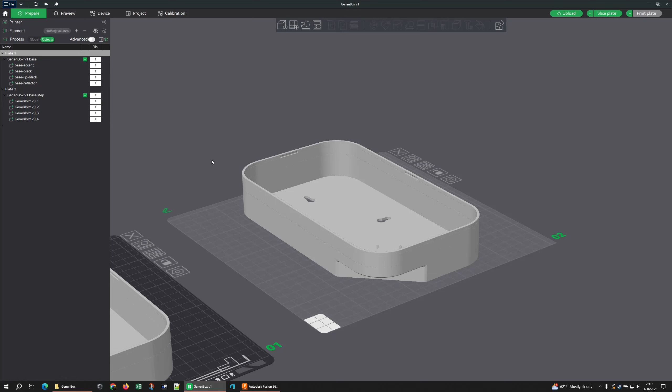Now the step file, however, I can break into parts - not objects, but parts. You want to use parts because it maintains the geometry, like the Z distance and everything. If I break it into objects, they all just fall to the floor, which is no good. So I break it into parts, but I don't have names or anything. There's only 4 parts in this object, so that's fine, but if I had something with like 100 pieces in it, that would really suck.

I can come in here and just by clicking on it, find where my accent piece is. I want that to be my glow in the dark, and then 4 is going to be my silver piece.

So I've got my 3MF here, it's got all the little bits and pieces in it that I want it to have. Looks pretty okay.

I come back over to this one that was my 3MF import, and we're going to do the experiment while we're here. Let me change all this to black, and then I can very easily know that my accent needs to be that, and my reflector needs to be that. So these are now identical in every way - same exact file, same exact settings, nothing has been changed.

The process I'm using on this, I've got a specific one I've set up for bases. This is going to be all global attributes, so nothing is unique between the two.

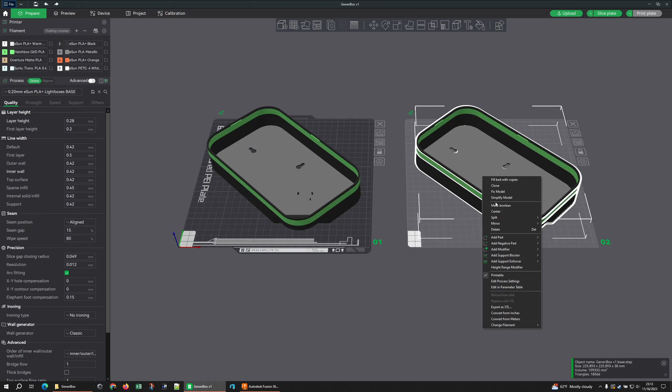I do want to do one more thing. I want to rotate these 45 degrees because walls always print better when they are not planar to your XY axis - less vertical fine artifacts when you do this. So yeah, is that centered? Let me center it. Oh, well, crud, didn't mean to do that. Center, please, back to where you were.

Okay, so I've got my 3MF over here, I've got my step file over here. They are in the same orientation, everything's the same. So let me slice all of these real quick.

And here's what I'm curious about: this one, the 3MF, says it'll take 2 hours 31 minutes. The step file takes 2 hours and 13 minutes. It's the exact same file, exported at the exact same time with the exact same settings, and it's 20 minutes faster to print the step file than it is to print the 3MF.

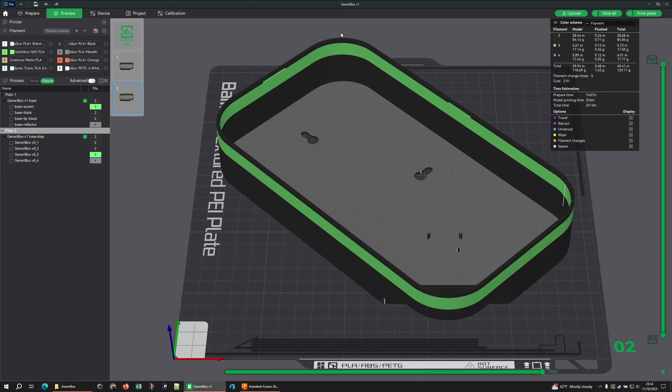I think if I come in and look at the line view, what we're going to see - I've got outer wall, inner wall, and 2 inner walls. Now if I go back over to the 3MF and look at it, I bet we have some gap infill or something. Nope, it's the same. I don't know why it's faster. That's confusing. Something's up.

It's got to be something with the way it processes the geometry and figures out what to draw. I can't explain that - except I can explain it. Looking at the times in here, you'll actually see that the less precise geometry of the 3MF is causing a lot more travel time. It's having to move around to try and print walls because they're not perfectly straight in those curves. Now this will be different from model to model, but generically speaking, I think it's safe to say that step files will simply print better and faster.

So yeah, the step file prints - what is that, 2 hours, 150 minutes total, 20 of 150. That's a pretty significant savings. That's what, 17-18% faster just by using a different file. I like it.

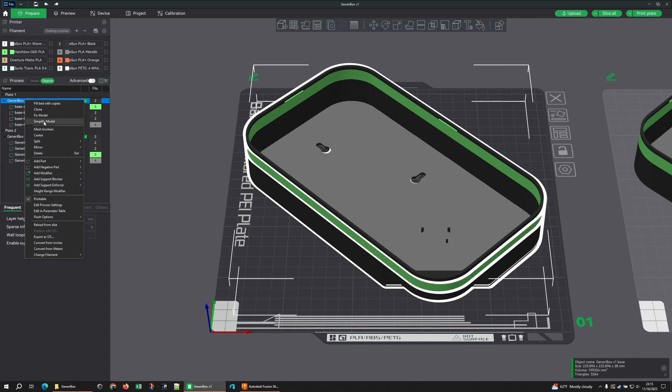So yeah, I don't want to print the 3MF. I'm going to go back to prepare, and I'm going to take my 3MF file, and we're just going to delete you because I don't want you no more. You're slow, goodbye. We're going to keep the step file.

A couple things to look at on this. If I go into preview and scroll down, if I did all my presets right, this should look correct. First layer, second, third. Now we should get an infill.

It should be 2 or 3 layers of infill. It's not quite the way I want that to look. I want that to be more perpendicular. My infill line is going this way directly across the print. I want this bridging layer, which is my very first top surface layer, to be as perpendicular to that as possible. Let's see here.

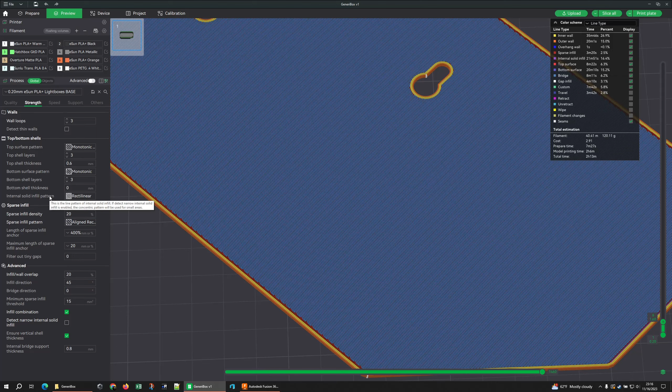I can change my infill orientation, but I really don't want to. I don't think bridge direction affects the top surface, and I don't think I have the ability to change the top surface layer. I really wish this top surface was going to print across this way. Usually it chooses the shortest distance to do that. I don't know why it decided to do this way.

It's pretty close to perpendicular though. That's like 15 degrees off, 10 degrees off. You know what, that'll be okay. I'm not going to worry too much, but it'll be a little bit rough. It's not going to print super smooth, but it doesn't need to be. If I wanted this surface to be smooth, I would add another layer to it. I would make it perfectly perpendicular, but that's going to be okay.

That should be a layer of black, and it is. Then I get my first silver, my second silver, and it didn't draw those where I wanted them, but that's okay. These really are just kind of basic guides, so I'm not too worried about these not connecting all the way through. Those go up, we get our hole, get our overhang.

Okay, so we need to paint on a little bit of support real quick, and we'll be done with this part. I'm going to get to center, please. Get to the view I want, and we're going to paint on with the fill bucket, overhangs only, 30-degree overhang. And I'm going to click here and click here, the 2 parts I care about. And slice.

And if I change my view to come back over this way, because I've got my tree set up a little bit funky already, change to line view. Excellent, it did exactly what I wanted. If I come down to that first interface layer, I've got a nice solid interface. It skips just a tiny bit.

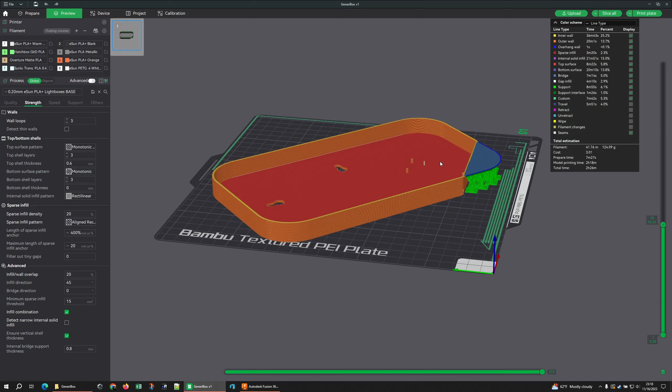And then if I look at this from, where is it? Sorry, I always forget which key shows me the top of the print. Control 1, by the way. Control 1 brings it up. So I'm looking straight down on it.

A little bit here that may not be the best because that's going to be unsupported, but that's a very short bridge between the supports. After that layer goes down, it'll start printing more normally. Yeah, that'll be fine, I'm not worried about that. That will print perfectly fine and normal.

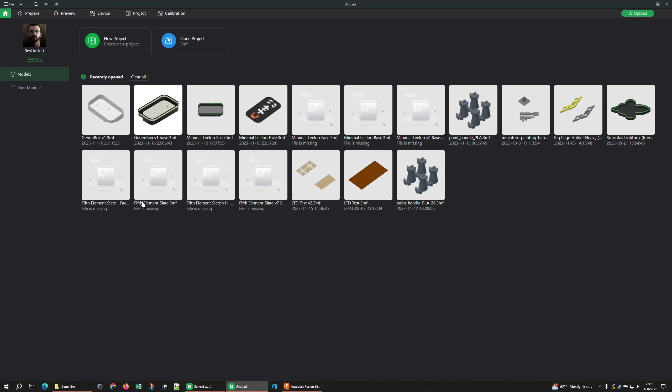I'm happy with that. Let me make a new window here. And this is one thing I wish they would change. Maybe they change it in 1.8 or 1.9 or who knows what. They'll do this eventually.

You can't have different global settings per plate. I mean, they're global settings, that makes sense. But I wish there were more things that are global options that were either part of the object options or could be plate specific. That would be nice.

Until then, I have a separate one for face. This one is going to print at 0.2. It's going to use a smaller first layer. It's using Arachne with a rather aggressive transition angle. Only one wall, top and bottom, and there's a whole bunch of different things in here that we use for this.

Because I care about the face, the bottom is what I'm going to look at. I have changed the top and bottom surface patterns, so monotonic line has become the bottom pattern, and monotonic has become the top surface. Let you get a little bit more in there.

Yeah, so let's go grab the face, or feth it. Same question, multiple objects, yes, that's fine. This one, don't really have to rotate it. It'll print fine either way. The walls are very small on this. I'm not that worried about it.

What I do need to do, however, is lay it on its face, flip it upside down. And I need to grab art lip, those two need to be black. And we'll move that out of the way, the prime tower. So yeah, that part's basically, that's it, that's done.

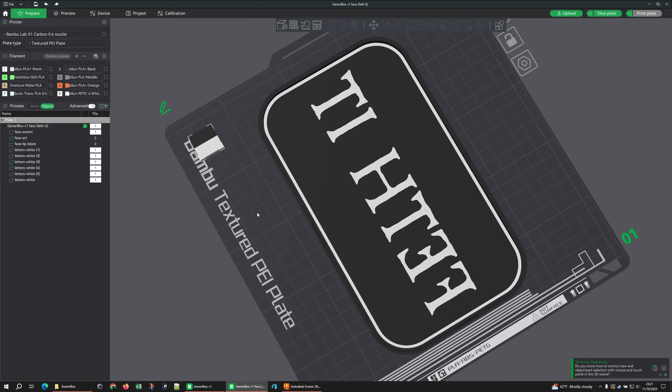There's nothing to change or set up on this. So with that, I will fire these off and jump into the next stage.

Remember when I said I was a little bit worried about not sticking to the silk? Well, fortunately, they're just there for alignment anyways, and not even necessary because I put tape on the back of the SP110E. A little bit there. These are really, again, just alignment.

I'll line it up, put those in the back, and then make sure it lines up in the front and squish it down. It's part of what's nice about using this - it requires no solder. That's it, it's done.

Okay, so stuck that in. That's not going to go anywhere. That tape will hold it in there just fine.

For the strip, I personally am fond of COB LEDs. I love the way these work - they don't cast shadows, they light things up nice and evenly, they're good and bright, and they fit very nicely in here.

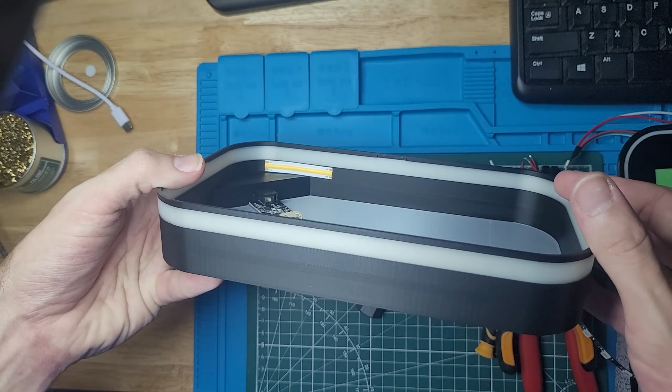However, I want this one to be a little bit more special. That's why I put the SP110E in here. A normal WS2812B LED is usually 10 millimeters thick - it would probably not fit in that little alcove.

I've picked up some of these that are narrow - Alitove, is that how they say it? Alitove, yeah. They're only 5 millimeters, they'll fit really nicely.

What I need to do on this, I want to take off this extra wire lead that they give me because I don't need it. Honestly, I'll just save those wires for the next project - I can use them for one that requires soldering.

So just cut off the heat shrink. They put these leads on here because since these are 5 volt, if you're going to have multiples daisy chained together, you can have one controller run as many as you want - you just have to introduce additional power to the chain. So Alitove is nice, they give you these little pigtails to add power along the way as you go.

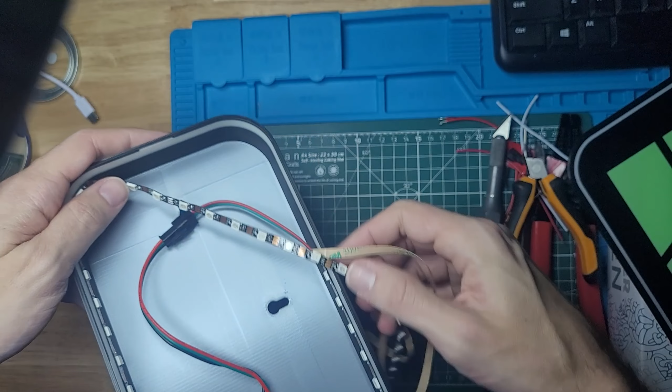It's absolutely knockoff, cheap stuff, whatever. And you get these off AliExpress or wherever - what do you expect? But cleaning the inside of the print before you go to adhere these will ensure that they actually stick well and stay stuck. Because what might go on immediately and seem like it worked will then turn around and fall off a week later.

And it looks like I need to cut right there. Alright, so what I ended up doing, I put a little bit of electrical tape just to cover up that contact and push it down, keep it out of the way. I put a piece of harness tape, I love harness tape, on the wire just to hold it down. And that's it - no soldering, just a little snipping and taping it on.

So let's find out if it works. Just like that. And then take whatever faceplate we're going to use. Perfect.

The gray that you're seeing is an anti-slip rug tape. It works great to stop these from scratching walls. And I already had a feth it, so instead I made a wumps cut.

Okay, so I have my sign. It's been hanging out in vertical orientation, and it's time to change the plate. I'm just going to get my thumbnail in between here to pull up one of those little tabs, run a fingernail around, put in a different one. And now I have a horizontal sign.